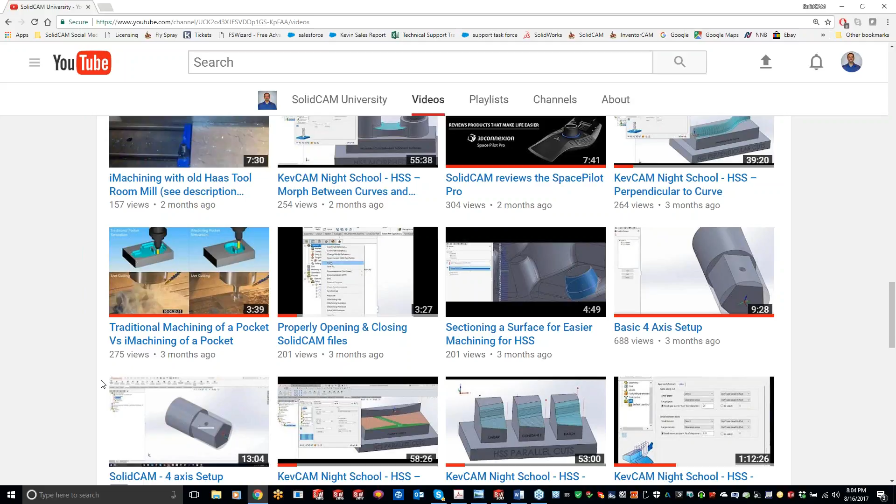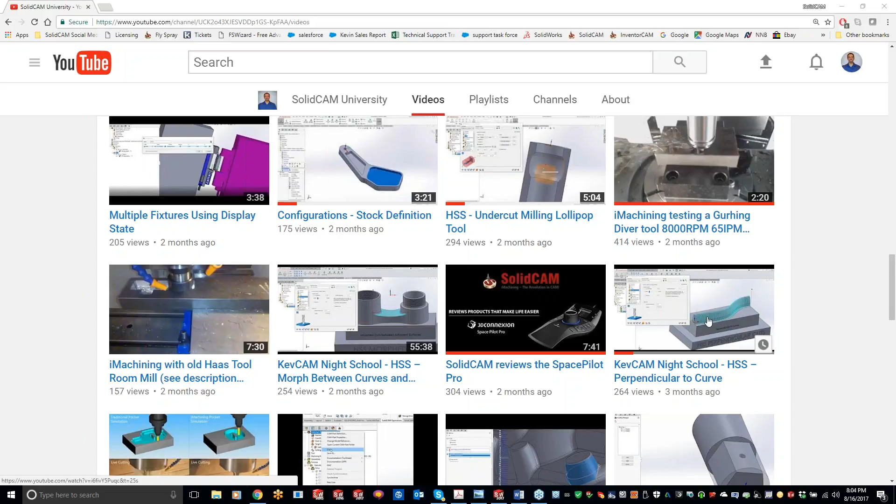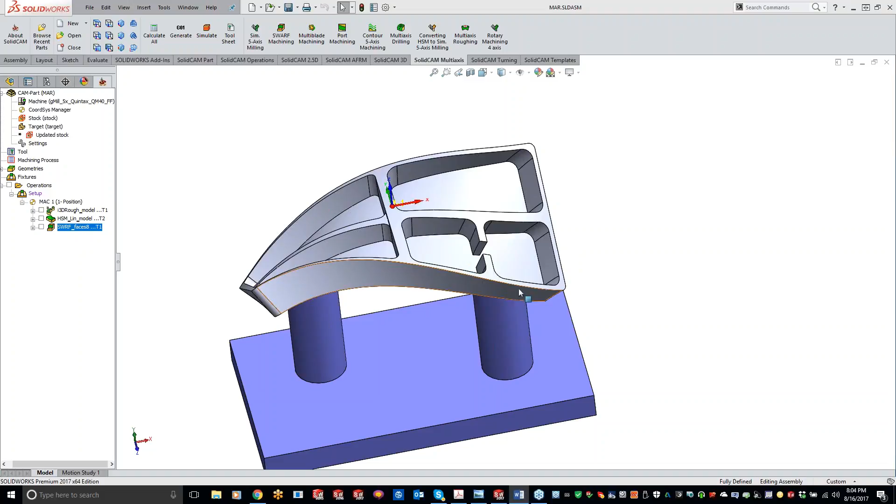With that being said, let's dive into the multi-axis roughing. Multi-axis roughing is kind of a niche for the 5-axis side of things, and multi-axis is more or less just for doing pocketing in a 5-axis environment. So you'll see we have a pretty radical aerospace part right here. Normally, to machine this part, we would have to separate everything off, and we're not going to be able to contour to that floor, wall surface, or ceiling - it would just be straight lines going across and machining that out. So to actually get down in there and get a good roughing 5-axis cut and get that material out of there, we're going to want to use our multi-axis roughing.

There's a couple different options in there, and it's pretty simple to use, but it's kind of a niche area. Personally, I haven't used it very much in the 5-axis side of things, just because it takes that special kind of part. So a lot of those aerospace parts, or if you're looking at doing a bunch of pocketing on a curved surface, this is where it's really going to shine for you. The curvature doesn't matter, the sidewalls don't matter either, but we do need to have a floor and sidewalls for this toolpath to work.

So like I said, kind of just more or less for the pocketing side of things. But with that being said, I got this part kind of roughed out. So we just did some 3D machining, some HSM, and I'm just going to simulate the swarf machining here. We're going to get to swarf machining in the next couple classes, but I want to show you guys what we're starting off with here on the machine sim, and then you can see where we're going to take it from here.

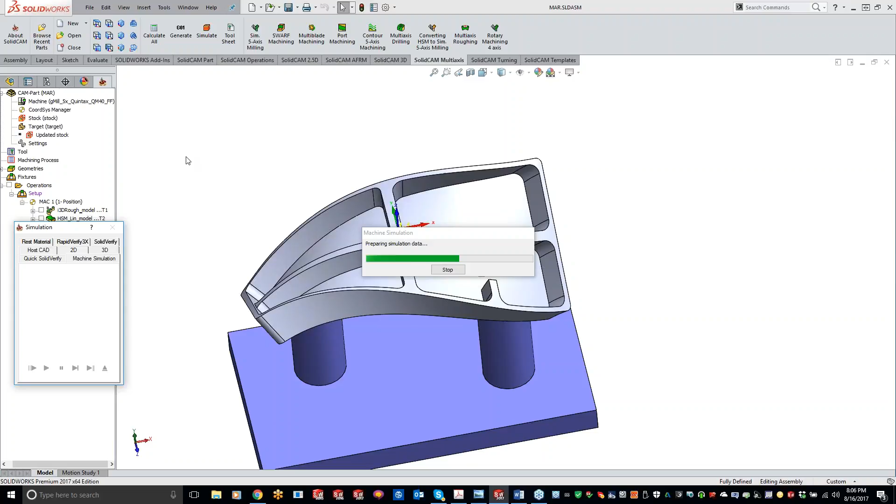So I'm going to load up this machine sim here. Now this head 5-axis machine that we're using is fairly large, so it does take just a hair longer to pull up the machine sim. All right, now we're getting everything loaded up in here.

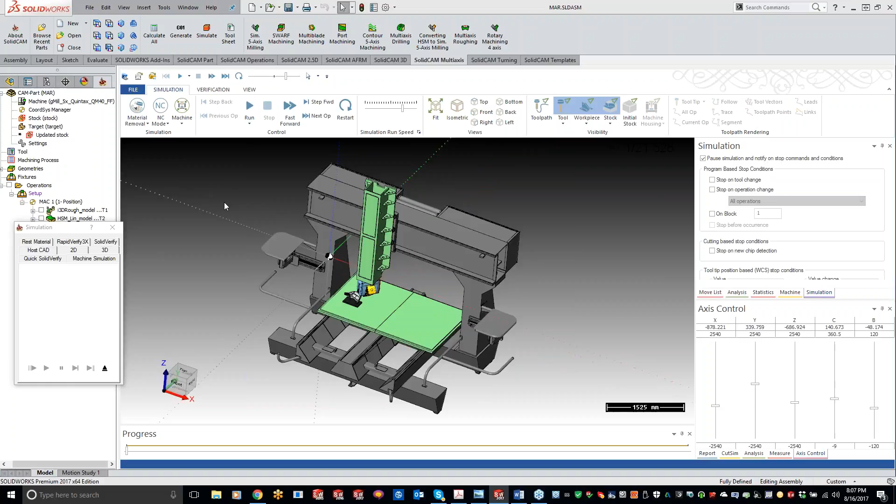Okay, and Norm, is this the machine sim that you were kind of looking for? Let's see if he pops in here.

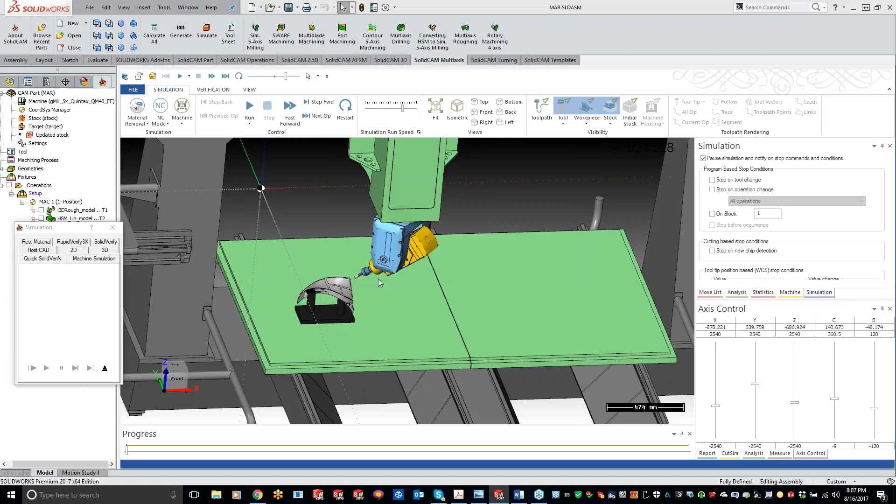Okay, so just got this bolted down to a big table here, kind of like a 5-axis router. But we're not using a trunnion to do the 5-axis. We're going to be using this head here. So if we go ahead and play this through, just going around the outside perimeter, getting everything machined off. So you can see where we left off. Let me zoom in here. We just got everything roughed out, everything but those pockets inside the center there. I can speed this up just a little bit.

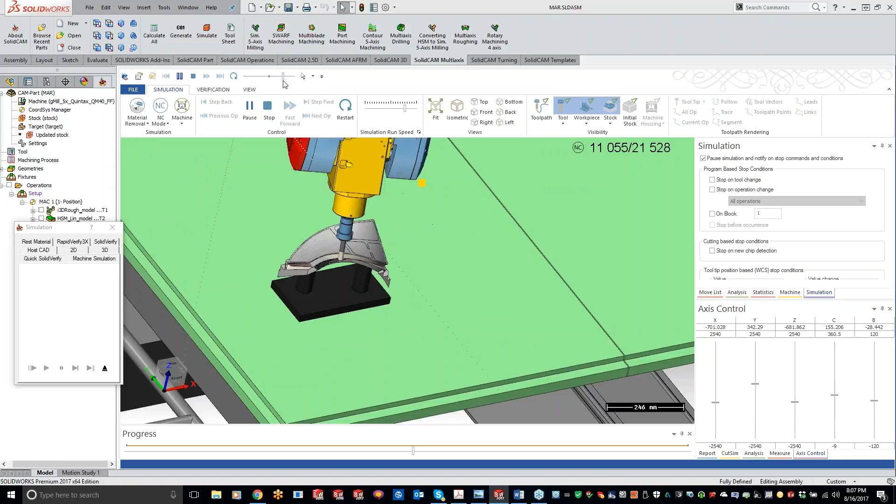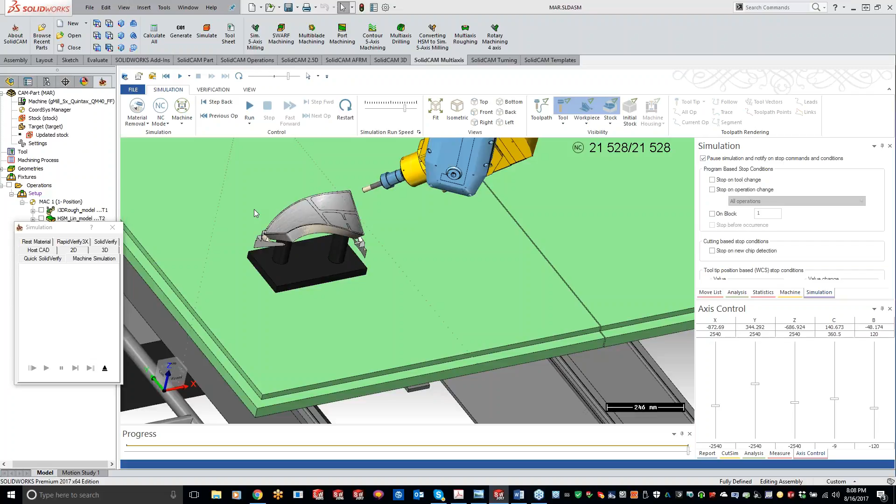Hey, Kevin, looks like Norm has a question. Or just, I guess, answering your question. Oh, yep. Yes, very, very similar to ours. Perfect. Thanks, Norm. Norm, do you have a machine sim for that machine? I got the post from the posting, but didn't have a machine sim on file for you. So if you do, Norm, definitely send that over to me in an email, and then we can actually use your machine. Not next week, because Justin's going to be doing a pretty sweet impeller, but the week after that. Yes, I do. Perfect. Yeah, send that over to me, Norman. We'll get that put in here too.

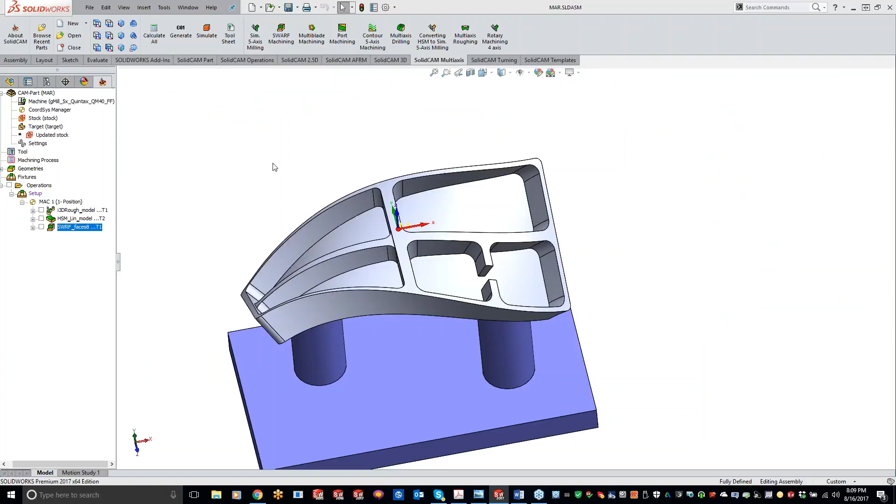All right. So here's where we left off. We have everything basically done all the way around the outside of this goofy part. Started off with a big block, but now we need to get in there and rough out these pockets. So go ahead and exit out of here, and we'll grab our multi-axis roughing. We only have one option, radial roughing right here. So we can hop down to our geometry.

Now we have a couple different strategies here. We can use offset, which is going to do a pocket style, where it starts in the center and works its way out. Or we can do adaptive, which is going to do a spiral. So two different tool paths that we can pick from. Now, one other thing is we can do an offset from floor, so the tool path is going to follow the curvature of that floor. Or we can do offset from ceiling, so it's going to grab the curvature from the ceiling and work its way around that part.

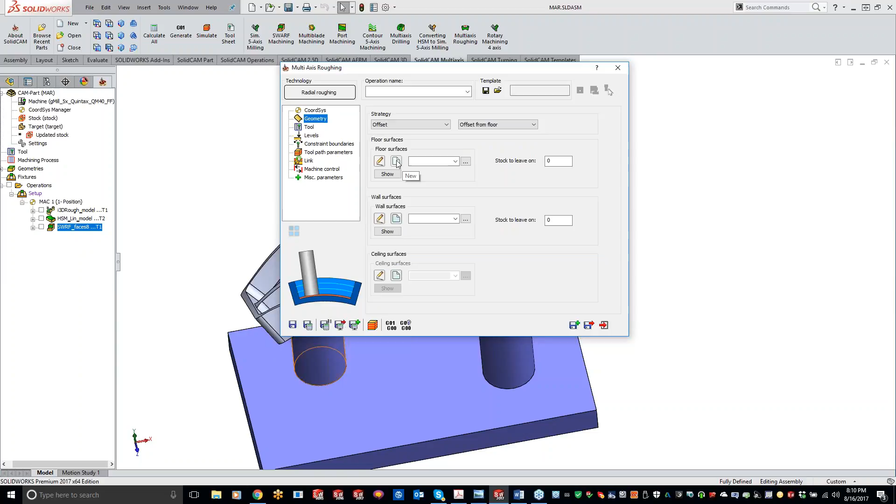Or we can do a morph between boundary curves between the floor and the ceiling. Like we were talking about with 5-axis morph between boundary curves, it's going to take the top and the floor and merge them together. So at the top, we're running flat, but when it gets down to the curvature, it's automatically going to start curving around there. But for this one, we'll just do an offset from floor, and basically choose what floors I want to work on. So we can go ahead and grab these 4 floors here. So those are the 4 floors that I want to work on.

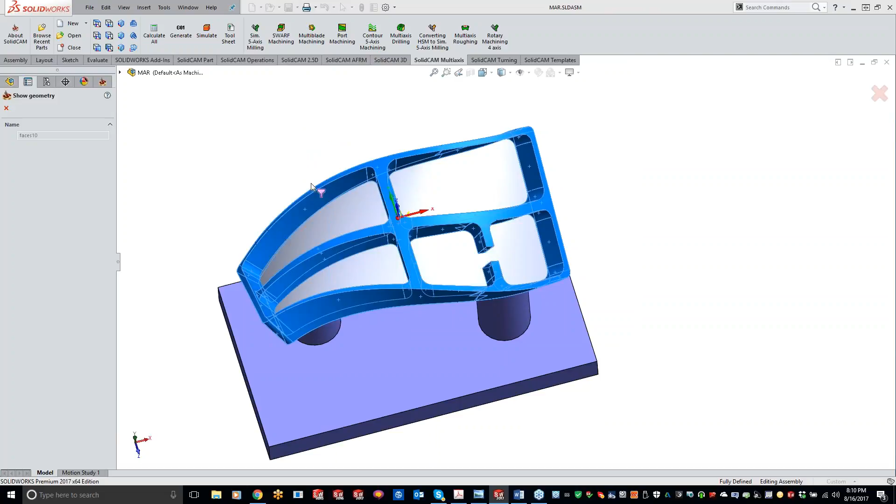And now the wall surface. Now, I already went through and grabbed the wall, but here I'll show you. Grabbed pretty much all the walls that I could here. Now, one thing is, and actually I'm going to be going to development with this, but when we did the HSS and the check surfaces, there's that button over here where you can say all adjacent surfaces. I'm going to see if they can add that in for us here.

I think that would really help out because when you're working on the multi-axis roughing here, pretty much anything adjacent to that surface is what we want to use as our wall, since we're using pocketing. So I'm going to see if I can get that added in there and save a little bit of click time for you guys.

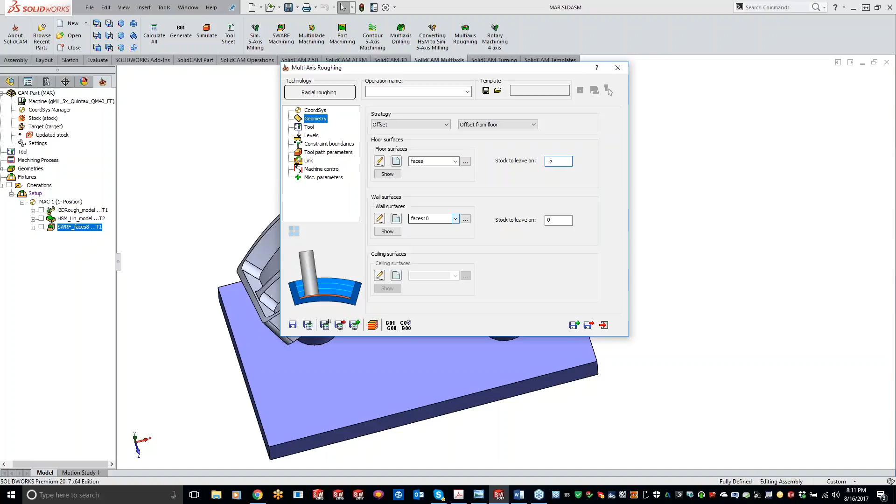So that's the floor surface, the wall surface. Now in this one, since we're just doing offset from floor here, I don't even need to pick anything on the ceiling surface. And we'll do a 0.5 millimeter floor and a 0.5 millimeter for the wall surface there. So we got something to come up and clean up here. And we can go ahead and grab our tool.

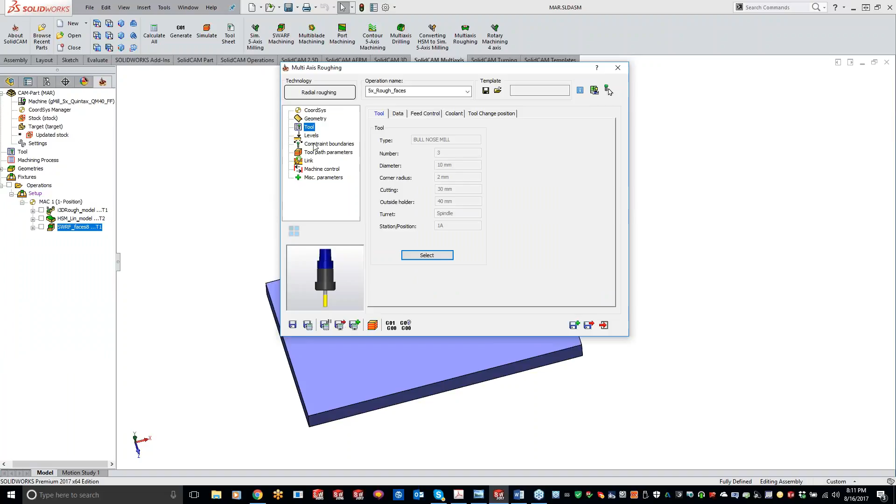And we'll grab this 10 millimeter end mill here. Levels, not much in here. Pretty much everything's kind of locked down. The only thing you really have in here is retreat distance, your safety distance, and exit distance, so you can change those around a little bit. Advanced, nothing we can even pick in here. Constraint boundaries. Where do you want to constrain it to?

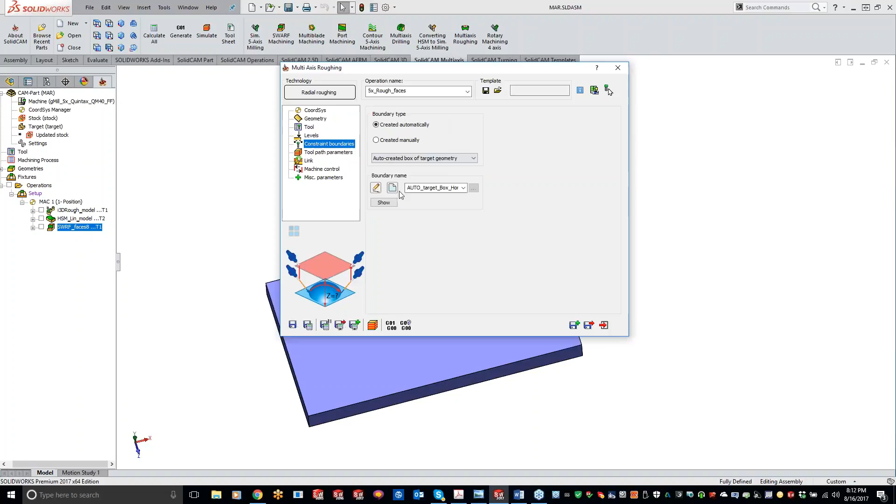Now, a lot of times, depending on what you're doing, but for this particular one, since I'm wanting to do this entire area, I can just leave it on automatic. But if you guys wanted to, just like HSM, you can come in here and do manual and do a chain around anything that you want to constrain it to a specific area. So a little bit of HSM in there for you guys.

Now, when we get into the guts of things, right here is your step down and your step over. So for this particular part, let's do a step down of 5 millimeters, and the step over of 4 millimeters here. So that is your step down, step over.

Now you'll see right here, we're grayed out. And we don't have that option to change those right now. And that's because the strategy is what determines that, and we picked offset from floor. So when we switch this over to do the adaptive or the spiral, these options will actually open up for you.

All right. So if we go to sorting here, we can do zigzag, climb mill. We can do machine by levels or regions here. Smoothing, the default works very well, but basically, do you want to have smooth corners, or do the sharp 90-degree corners? And same thing with the final cut. And then, if you want to do smoothing between the links. So as we're going from one pass to another pass, it's going to do a little bit of an S curve going into the part there. And you can change up those percentages there.

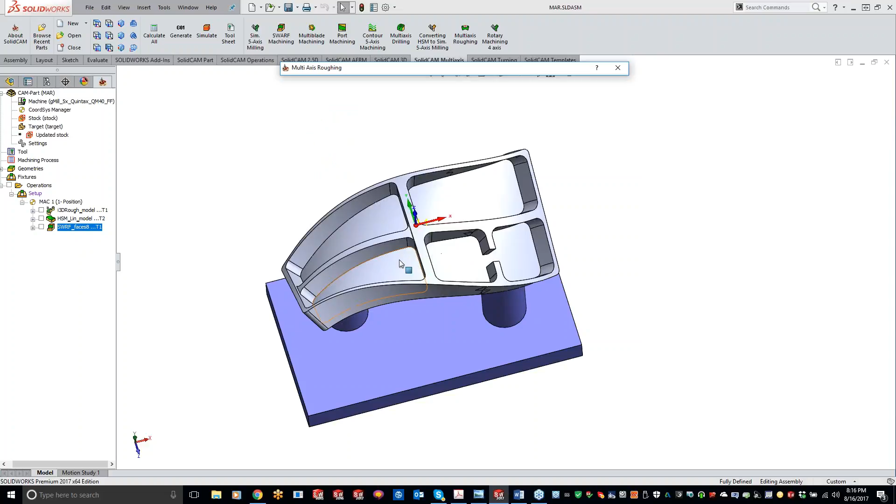Approach and retreat here is, do you want to lead in, lead off on that first entry point? And then here is between your slices and all that stuff. So we can do retract distance. And what I like to do with these is when it's going between groups, I want it to retract, obviously, so I don't plow through my wall. What I'm talking about is when it's working from this section and then coming over to this section, obviously I want to come up to the clearance.

But what I want to do is use a ramp going in there. And then same thing between my slices. Since it's going direct, I like to go back up to the rapid, and then I can use my ramp, and same thing between regions here. So if we do, yep, we can use ramp right there.

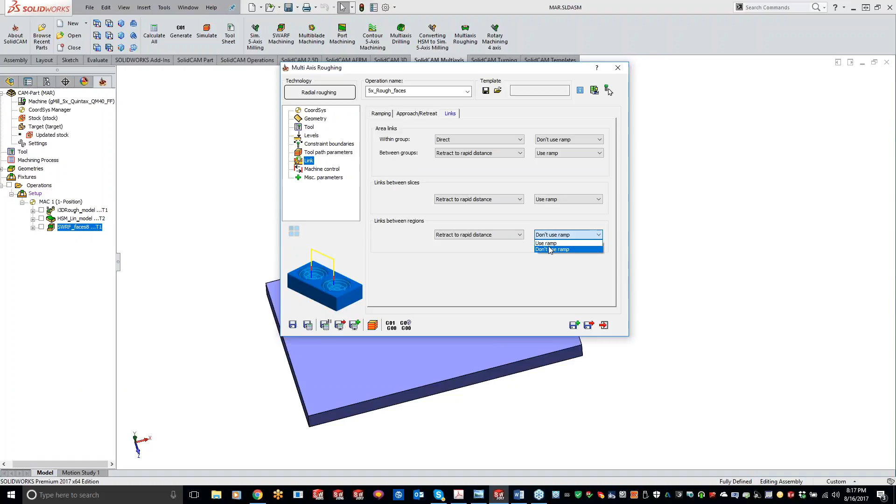So one other thing I wanted to mention is your surface quality. These are set actually quite tight. What I notice is with the cut tolerance, since we're roughing, the cut tolerance really isn't that important. If you think about it, we're leaving 5 millimeters on the wall, 5 millimeters on the floor. So you guys can open this up. Like I said, on this part we're working in metric, so I'll just do 0.1 millimeter. And that's going to save you calculation time too, to speed things up.

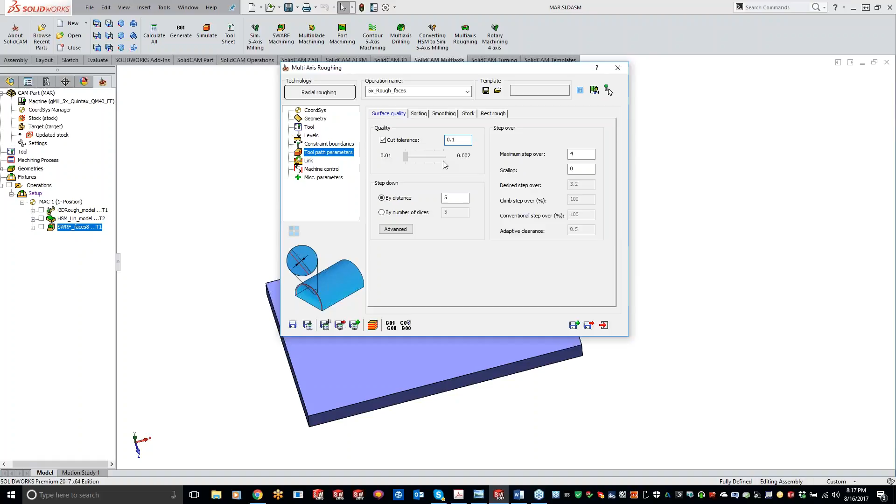So let's just go ahead, and I think I got everything covered here. Machine controls is all your 5-axis stuff here. This is the same in pretty much every operation inside SolidCAM, and same thing with the miscellaneous parameters. So with that being said, let's get some toolpath on here.

Now, unfortunately, my computer may be a little bit slower right now because we just finished doing a live iMachining cut literally 20 minutes ago, and it's still rendering out the video. So it may take a few seconds longer here.

Any questions with what we covered here so far? Like I said, this one's a little bit more of a niche area, but works very well.

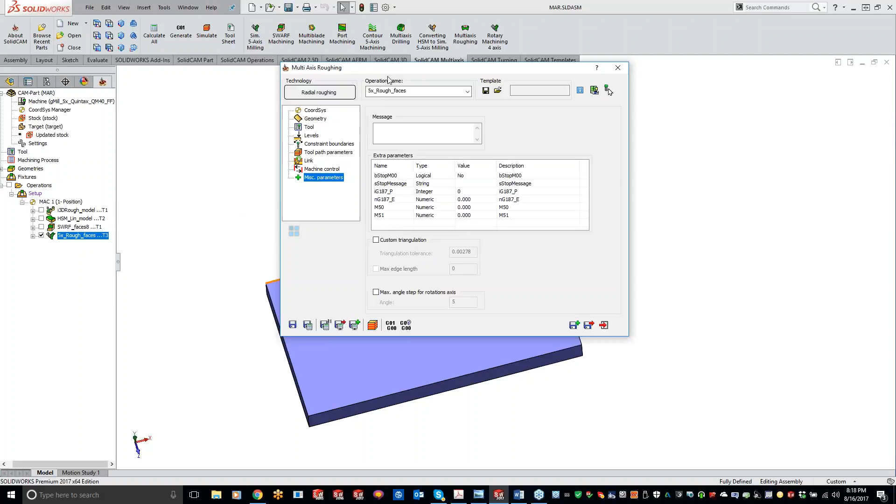Okay, so you can see our toolpath. I'll get a little side view here. Our toolpath is following the exact curvature of that floor going all the way around there. To get a better picture, let's do a simulate, and we'll start off with solid verify first. Get our updated stock going here.

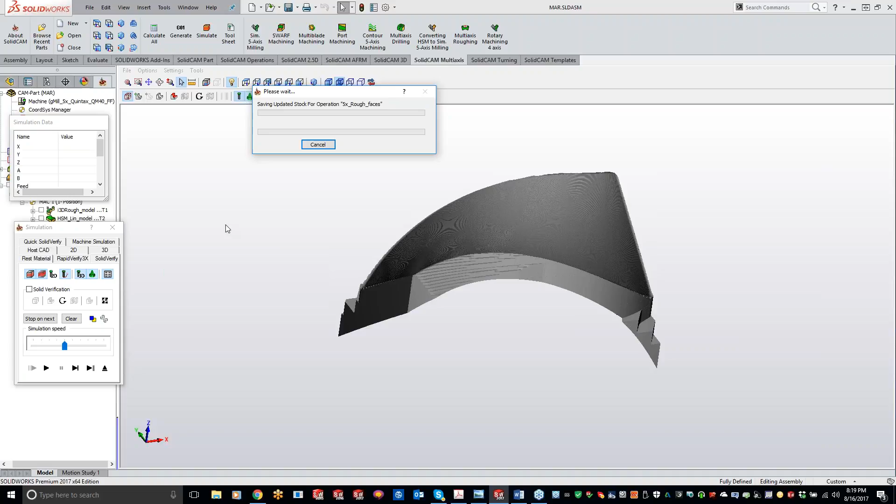Come on. Boy, that video rendering is really bogging down my computer right now. Okay.

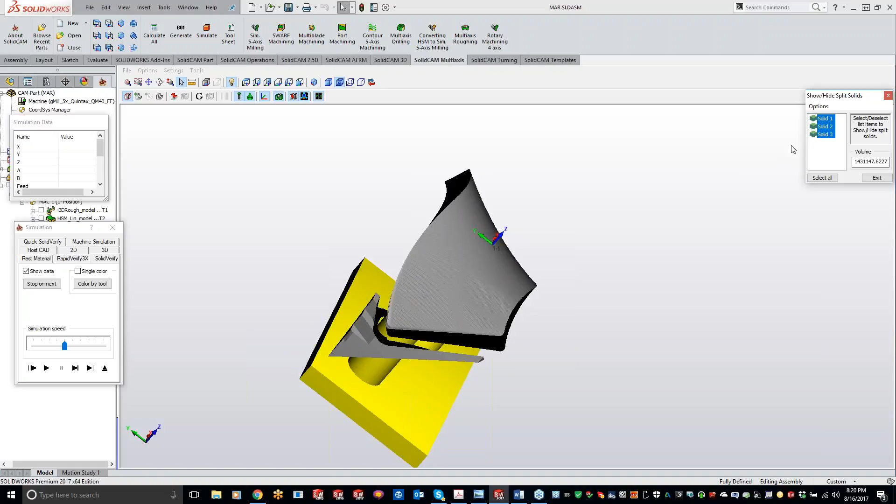So we got our part in there, and these are just the pieces that were left over, and if I want, I can come in here. I think it's this guy. No, that's my fixture. And I can, there we go, get rid of those slugs that would have fallen off there. All right, let's play this through here, and we can speed it up.

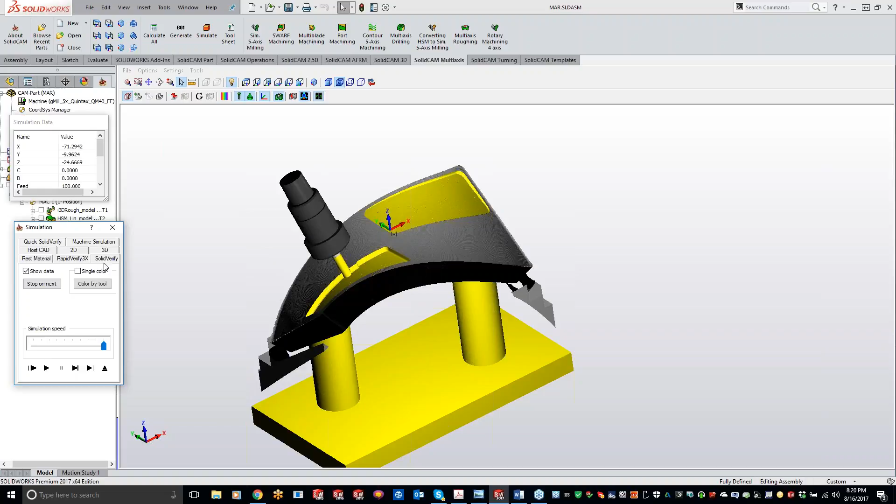So you can see the tool is following the curvature of everything that's going on there. Oh, and one thing I'm noticing here, you'll see I didn't go down to the full depth. What it's doing is coming over and doing each pocket at that level, moving over. Let me stop this for a second, and let's get that fixed.

So if we go to toolpath parameters, let's see, where do they hide that again? Toolpath parameters, sorting. And I'm going to go by region. What that means is it's going to work on one pocket, get it all the way down to size, and once it's finished in that one pocket, then it's going to move over to the next pocket.

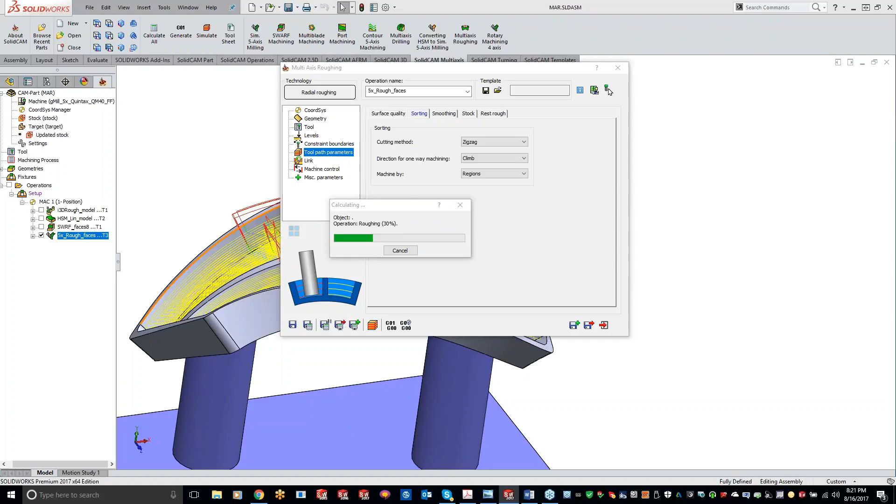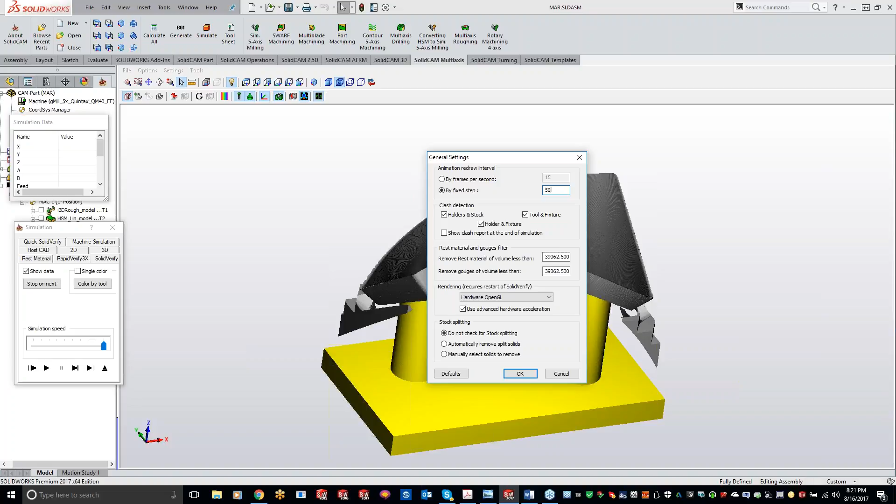Go. I'm going to simulate this here. Do solid verify again. And I'm going to bump up, or let's do every 50 lines of code here. So now we're kind of staying within that one pocket, and then it will bounce over to that next pocket here.

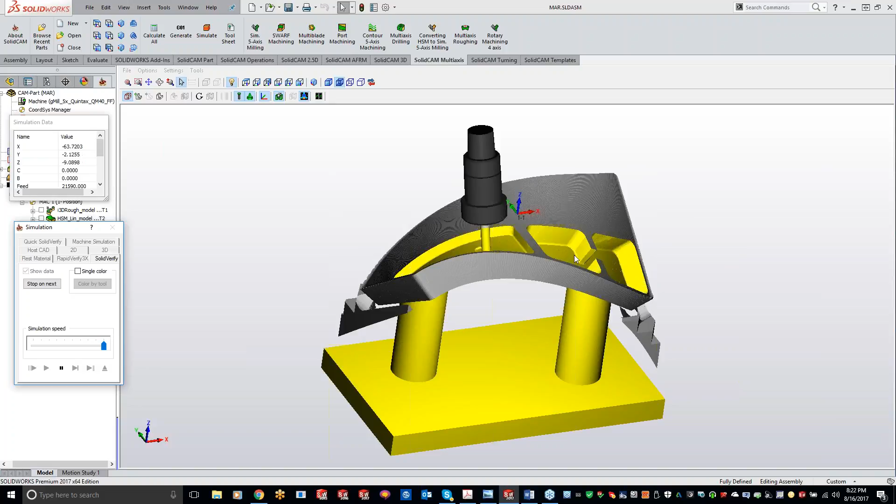Now, one thing that I found is, I guess, a little bit you don't have much control on is where it goes from the pockets. Even, I think I picked over here starting on this pocket when I clicked those faces, but it's really out of our hands on where it goes. I think it just kind of goes by the fastest route possible when you do by regions instead of by lanes.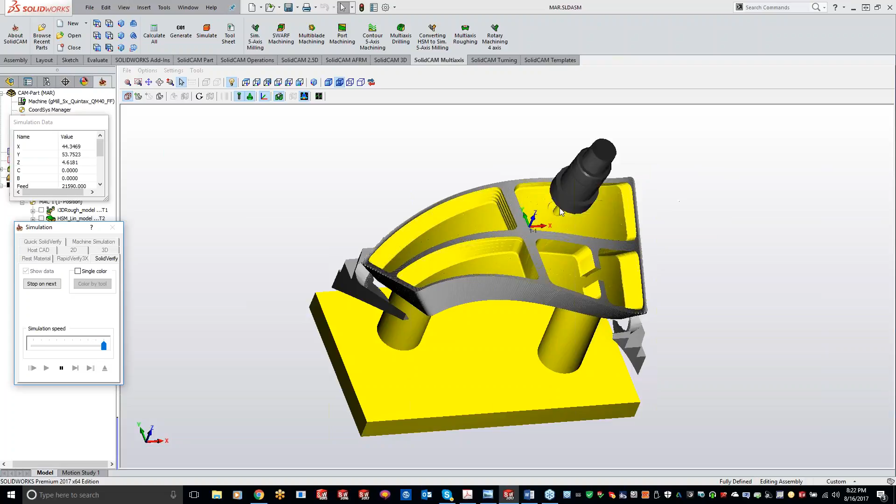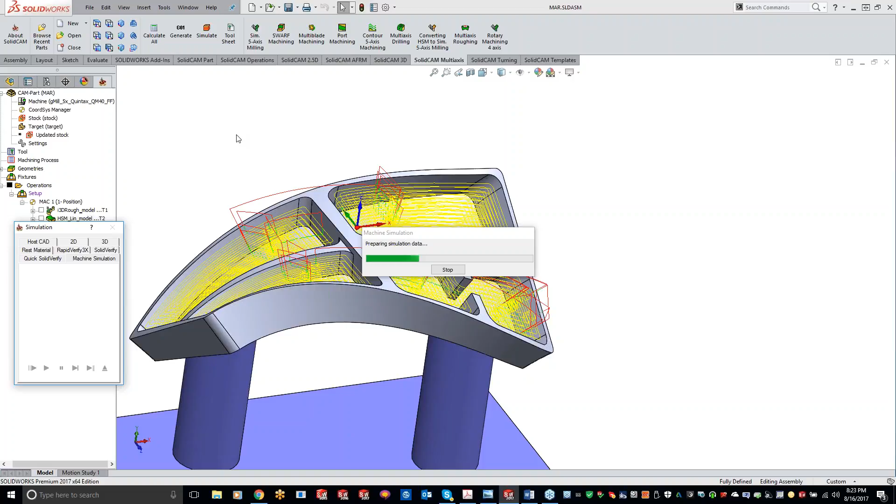But let's stop this and let's hop over to Machine Sim, and show you guys how that head is moving around in there. And if you guys do have a machine sim that you'd like to see me use in the next class, send those over to me, and I'll show you once this gets done simulating through here how to send that with the machine sim file.

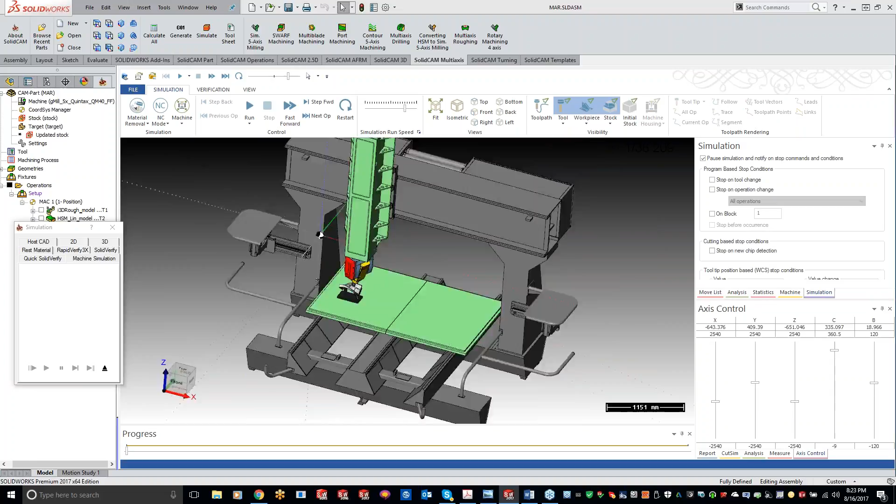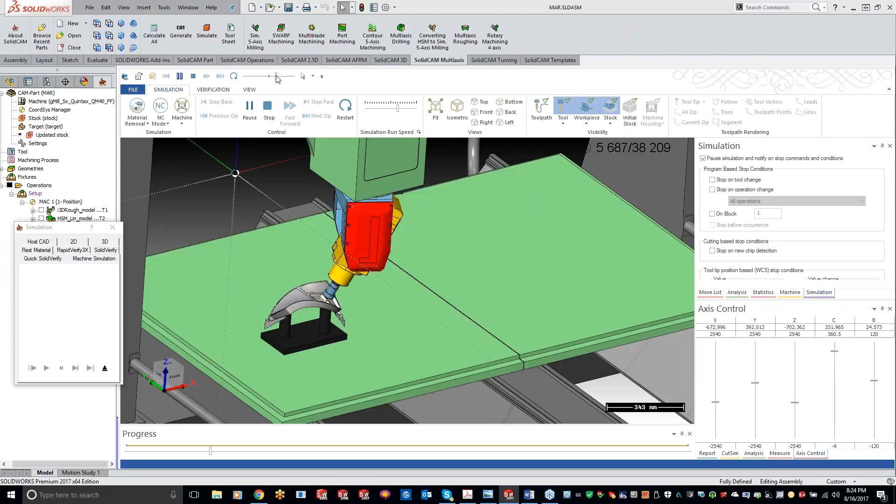All right, get everything loaded up here. All right, let's get zoomed in here, and slow it down a little bit here. You can see the head really working its way around in there. And then each time it's going down in a level.

Hey, Kevin. Yeah. Looks like we got a question and then a follow-up from Ben. Can you see that, or you want me to ask it to you? Can you make a smaller hole and then enlarge? Yeah, I don't know if that's easier there.

Yeah, let me, okay. But I can't machine. I can't even be trusted to read the questions. That's how little I know about what I'm watching here, guys. So I'm learning a lot.

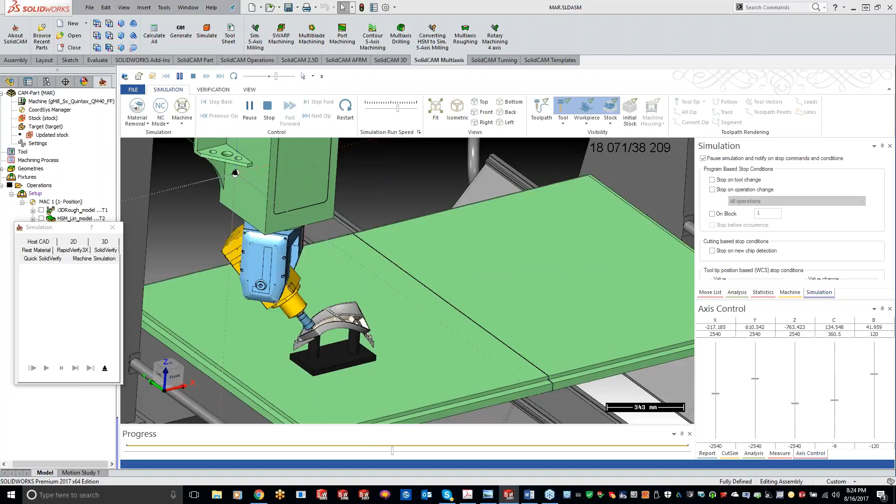Okay, so Ben, are you talking like do a pilot hole, and then it approaches in from the pilot hole? Let me check here once this gets done playing through. I don't think so, but I guess I haven't really played with that portion of it, but let me see if we have the option for that. Can I give you a different view here, you guys? And is everybody able to see that machine sim working?

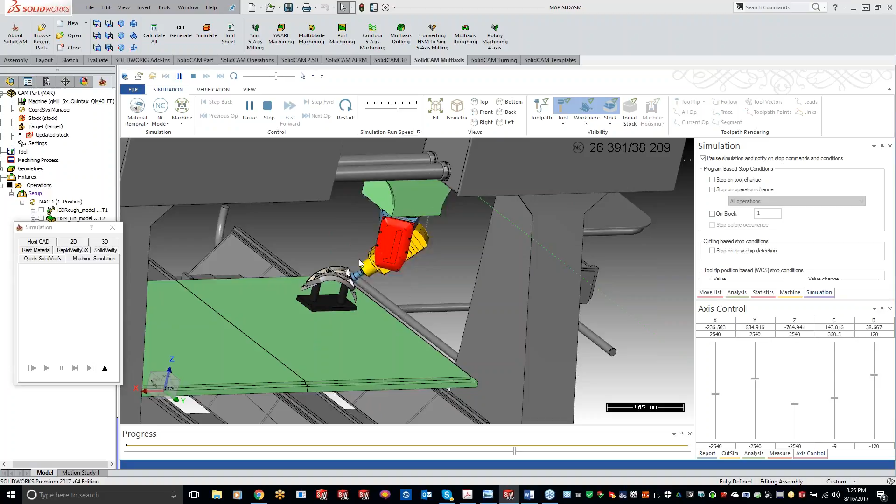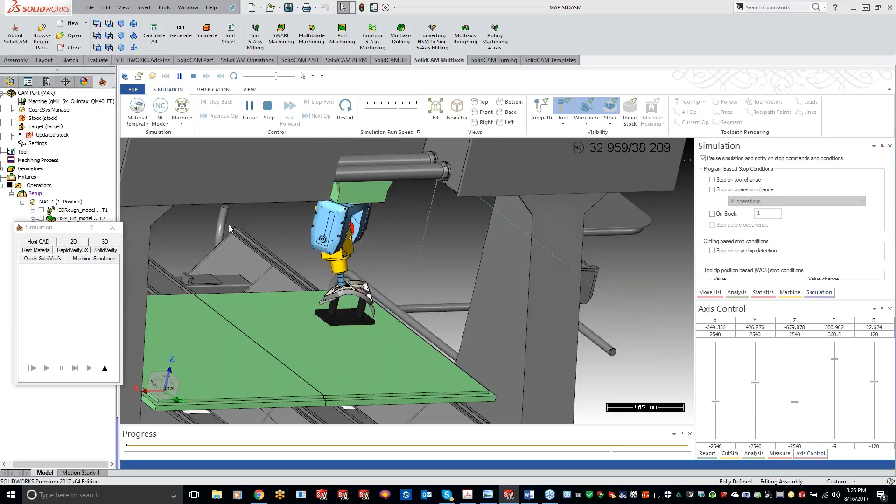What are you saying, Andrew? You couldn't program this part? I could do it in my sleep. It wouldn't look like that, but I could definitely do something. Yeah, this is no. And for those of you guys that don't know, both Andrew and myself have very young kids, so we don't get sleep period as it is. All right, so. Yeah, that's probably what I should do with my nights. Instead of even just pretending that maybe I'll get some sleep, I'll just go through and take all your classes. So. Yeah, there you go.

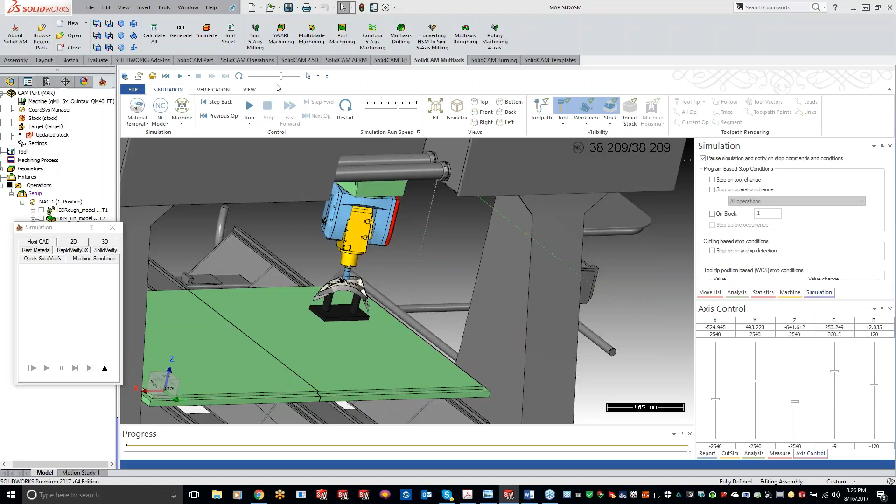We got another question or follow-up from Ben. All right. The reason I was asking was to use more of the tool length for roughing. Yeah. Let me hop out of here. And so if we go down to the toolpath and surface quality, I can take a larger step right here, but let's get into the link here and the ramping.

Now, I guess I don't have a hole in here, but I don't see any option. But let me tell you what, Ben. Let's see, was it Ben? Yeah, Ben. Let me do some digging on that and see if that's a possibility, if we can start off with a pilot hole, that way we're not wasting the time doing a helical entry going down in there for you guys. So, any other questions on this particular toolpath?

And great question, Ben, too, by the way. All right. So now we have got a couple here. Hang on. We got... No, I think we're good here. Oh, that's it. Sorry, false alarm.

Okay, maybe I can come down to Atlanta and see what we can do. Oh, absolutely, Ben. Come down and Ken will get you all straightened out.

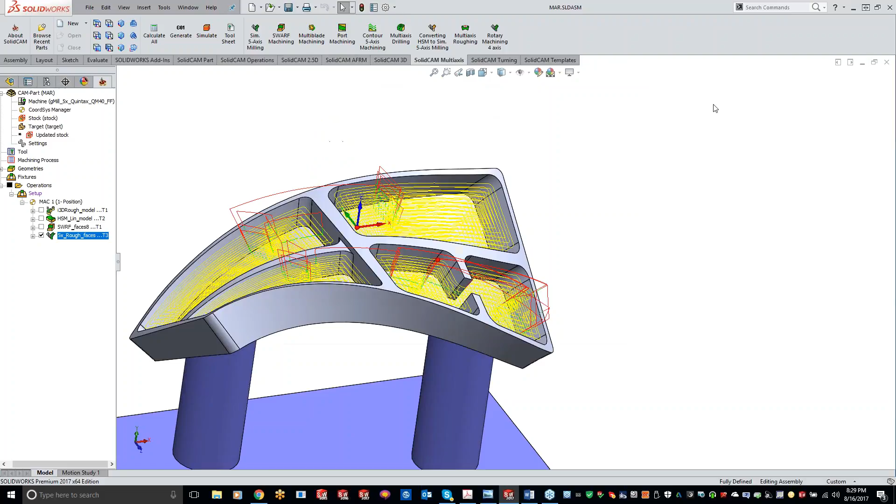Okay, so now we have the center completely roughed out. Now what I can do is use this as a finishing toolpath too. So I'll just open up this operation, and I'm just going to do a save and copy here. Our geometry is going to be the same, but now I'm going to switch it over to adaptive and show you guys the spiral and finish off the floor.

So I'll take off my stock to leave on the floor. And then the only other thing I want to change up here is my surface quality. Since I have everything pretty much roughed out, I can take this all in one step and just come down, because I just had that 0.5 millimeter left over. So instead of doing by distance, I can do by number of slices. Think of it as cuts by number of cuts. When we do 5-axis, you have the option to limit by number of cuts. That's basically what I'm telling it to do right here.

Now, since I switched over to adaptive, I get a few more options right here. I'm going to leave everything as default, but you can do a desired step over. Right now we're doing a maximum of 4 millimeter step over, but I can put a desired number in there and get a little bit tighter. And then I can change up my climb step over, so if I want to change it to 50% on the climb, or leave it at 100% and do 50% for conventional cutting. So definitely have that option right there.

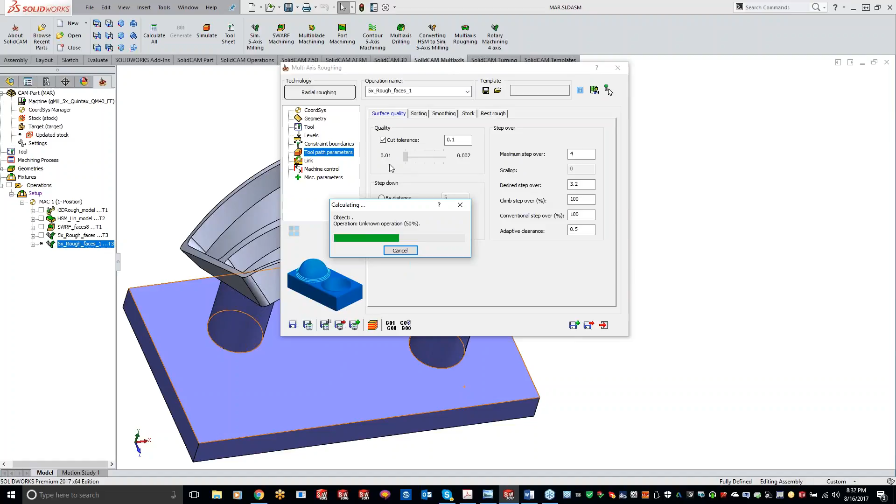Now I can set this down to 0.01 millimeters, which is pretty tight. What I noticed is I'm getting quite a bit longer G-code and longer saving calculation time, but I'm getting the same surface quality as before when I had a smaller versus larger tolerance. So feel free to increase that cut tolerance, you'll get the same results.

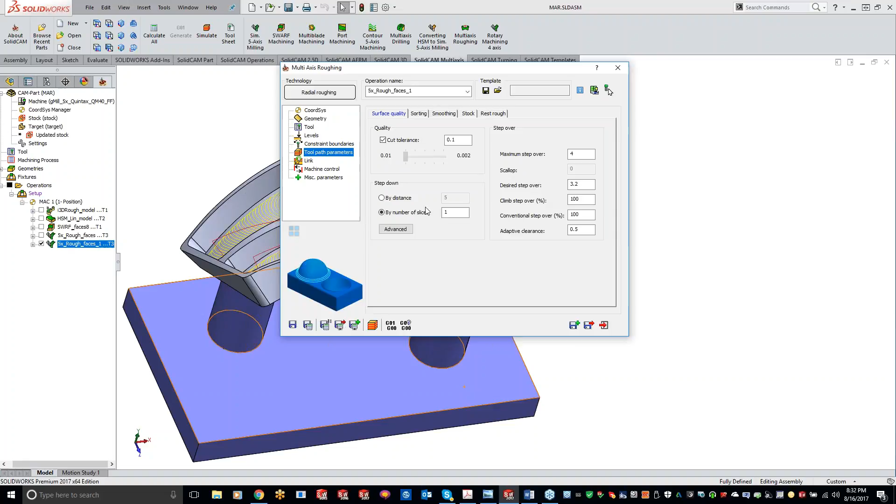Ben had mentioned here about the tool, you've got to watch out so the tool doesn't load up when plunging. Yep, absolutely, we've had that scenario. We were actually doing a live cut with that scenario, doing a helical ramp in there, but it was almost a plunge cutting.

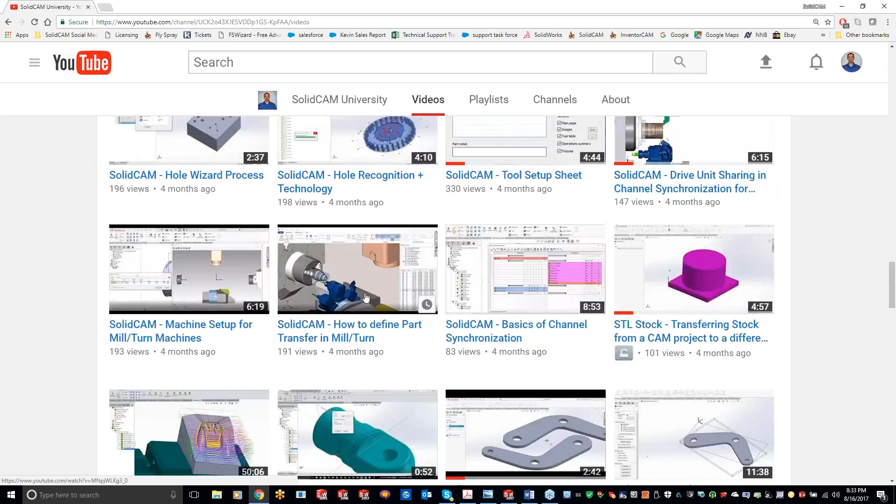For those guys that haven't seen, I did a video, let's see, it's a pretty cool one. Let me see if I can find it real quick. It was using that Gurhing diver tool. It must be up here. For the record, Ben, I thought the same thing when I was watching that. Right here is that Gurhing diver tool.

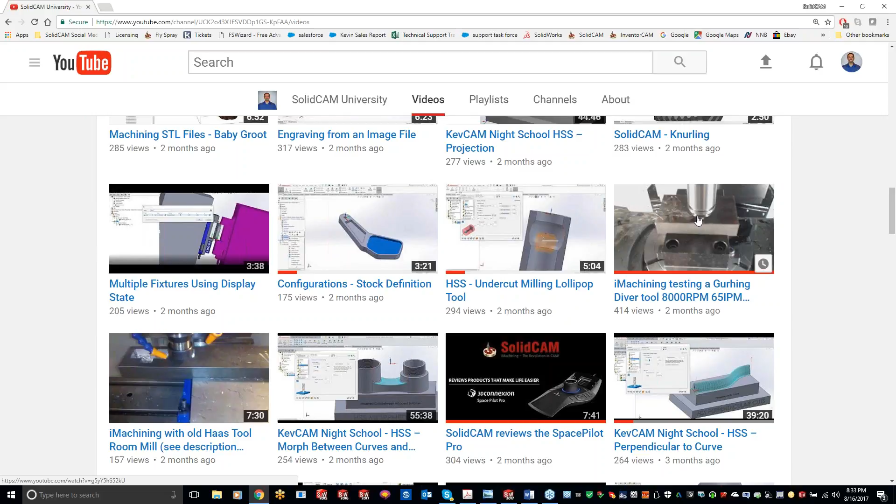What actually happened is we were doing a live cut, and we used the same angles and approaches for that Gurhing diver tool versus just a regular flat end mill, and we actually loaded up that end mill as it was coming down. So definitely a great point there.

Now you can kind of see coming in here, doing a nice spiral, working our way down, starting in what it thinks is a good spot, just doing a spiral, working its way around. As it gets to where it can't spiral or morph anymore, it kind of does iMachining, doing the trochoidal movement, working its way around. The only difference is it's not picking up as it comes around here, it's just race tracking around.

So if we go and play this through, let's try solid verify first here and show you guys. Get everything updated.

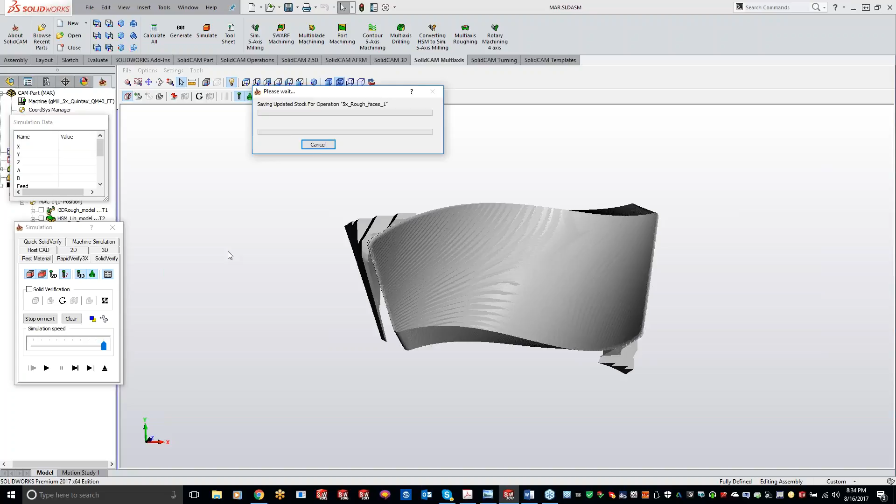All right, should be, here we go. We got, rather than a spiral, can you follow the form right? From Ben, let's see, spiral, can you form right? Can you give me a little bit more explanation there, Ben? I guess I'm not sure what you mean by form right. I guess, Ben, you have me a little confused.

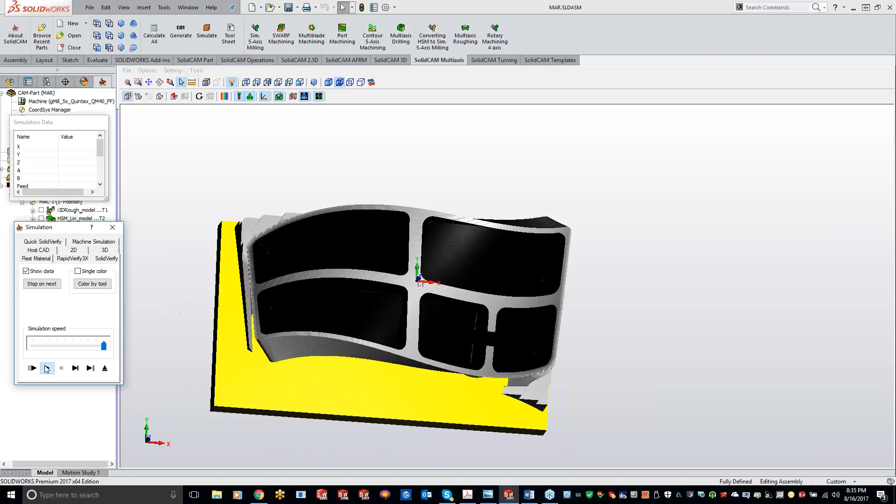Oh, kind of following the rectangle surface. Yeah, that would be more or less a diagonal coming in, and yeah, we can definitely play around with that real quick here. I'll go ahead and play this through, and let me get rid of that tool holder so we can see what's going on here.

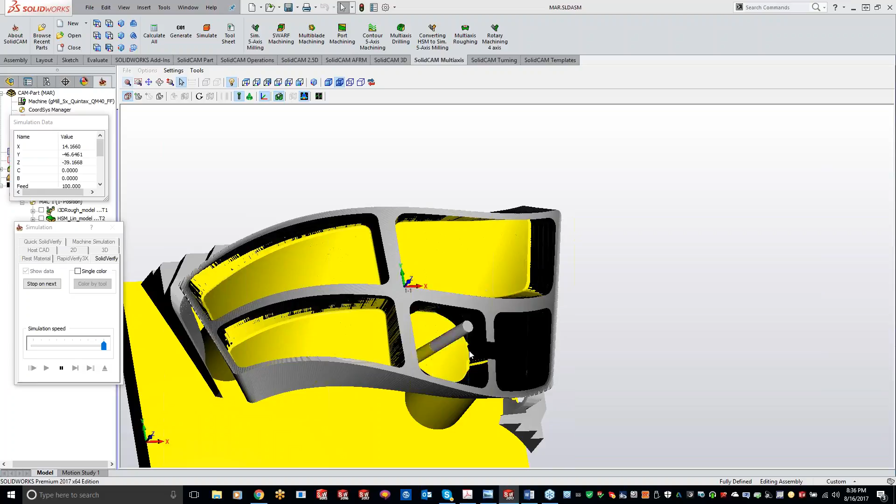Doing a zigzag, going back and forth, pretty much just cleaning up that floor is basically all we're achieving here, doing a spiral for the most part, or morphing I guess you want to call it. Then when it gets to the walls, it switches over to that morphing spiral, or I'm sorry, T-slot trochoidal movement.

There we go. And if we want, let's go ahead and play this through machine sim real quick so we can watch our head rotating around.

Like I said, something with this, I don't know if it's such a large machine why it takes so long to load up here, but we'll blame that one on Norm. He wanted to see a head rotation, so just kidding, Norm.

Okay, so let's get positioned in here, and we'll slow this down a little bit. Basically what it's doing is it's keeping that tooltip orthogonal to each cutting position.

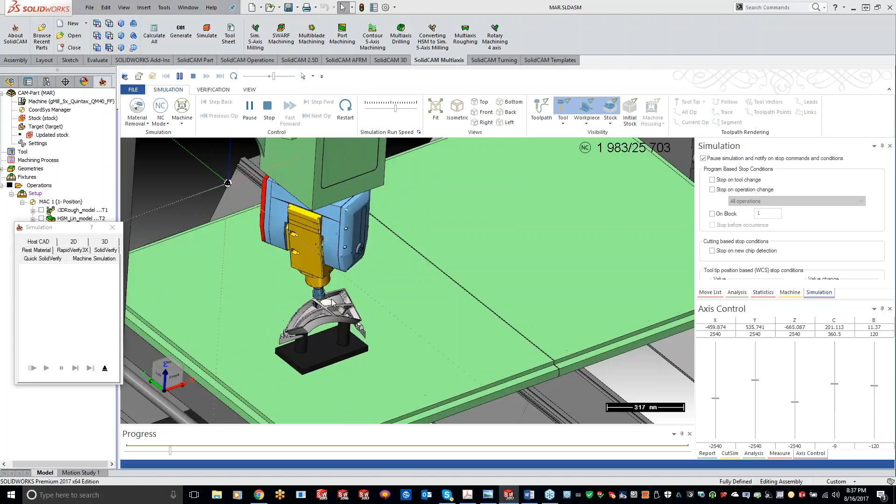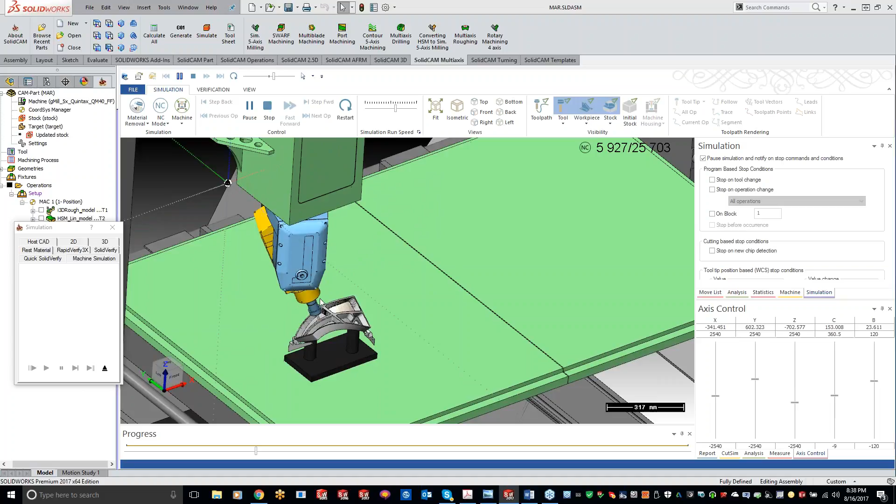Now I know we talked a lot about that with the 5-axis last time, but pretty much it's working on that tip. We don't have the option to work more on the side, using that lead lag angle and side tilt angle like what we did before. So this will get you a pretty decent finish, but if you're looking for that perfect finish, we definitely want to use a different strategy, one of our 5-axis ones that we've been talking about for the last couple weeks, or actually a month and a half.

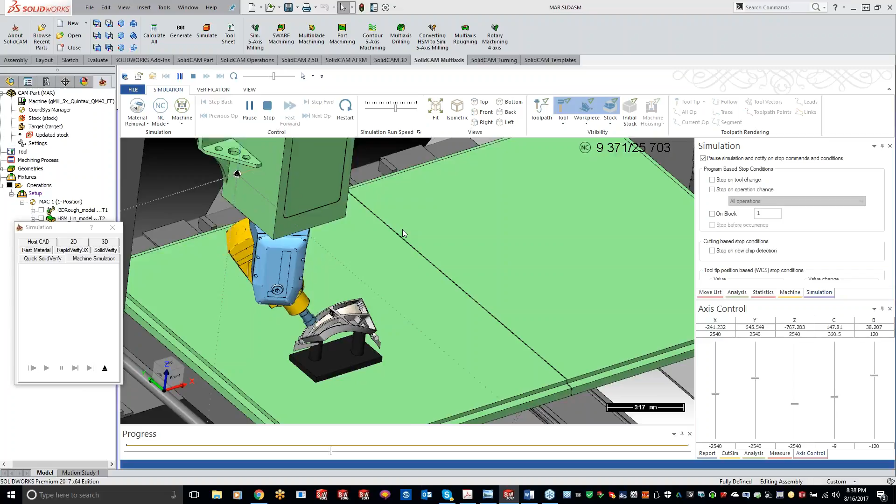So we can tip over, and instead of using the tip of that ball, we can actually use the side of that ball a little bit, just getting in there and working its way around here. Let me speed up just a little bit for you.

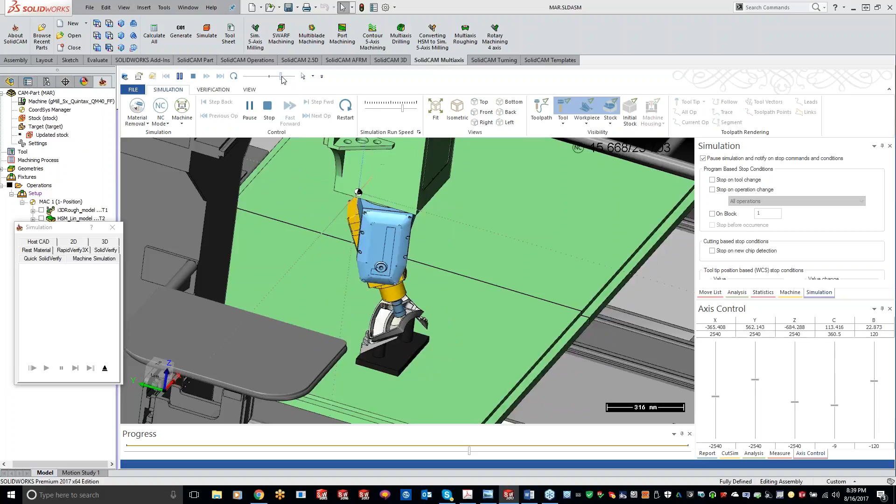Now let me ask you guys this. Have you guys ever ran across a part like this before? Anybody? It's a pretty gnarly part here, and my dad does a lot of work for Northrop Grumman, Lockheed Martin, and Boeing, and he said they see parts like this every once in a while. It's like they took it flat and just twisted it.

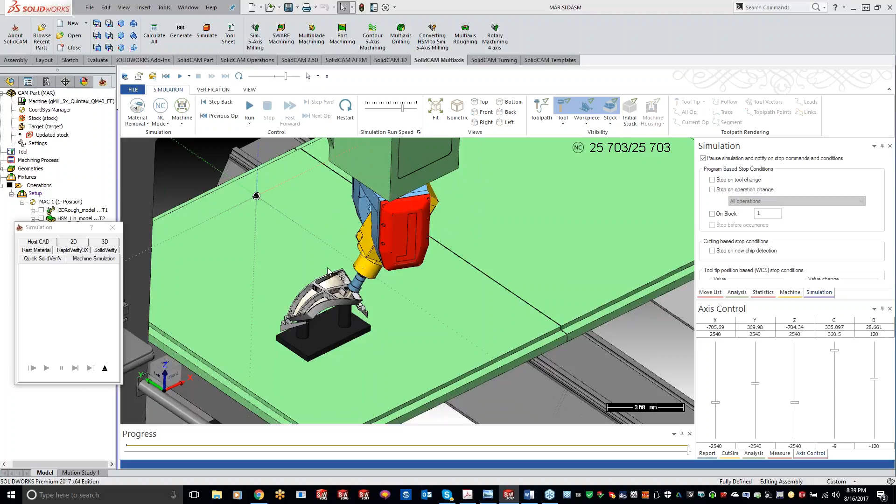But so there we go, kind of finishing off the floor there. And now to answer your question, Ben...

Let's see, we were going to... where did I go here? Ramping. Got a couple questions there, Kevin. Okay, so we got line right here, and let me just do a save and calculate.

Let's see, line ramp angle must be greater than 90 degrees. Oh, so let's do a ramp angle of 100 here.

Okay, I'm a little confused here. Ramp angle and adaptive roughing must be equal to 90 degrees. But when I had 90 in there, I didn't like it.

All right, well, this is calculating. No, my last CNC 4-axis machine was in 1985.

Ben, we were barely even born back then. I hate to say it, but no.

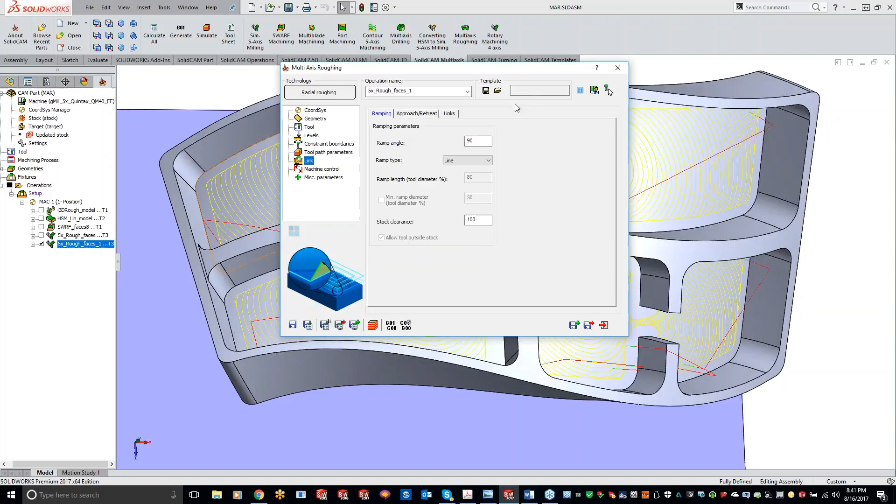All right, so if we go line... not doing much of a, looks like almost a straight plunge when we use line. Let's try - if we do a profile, I wonder if it will follow it - it should follow the profile.

Must be automatic line. Okay, so let's go to helical, or let's just exit. And since we are using it, it's telling us profile now.

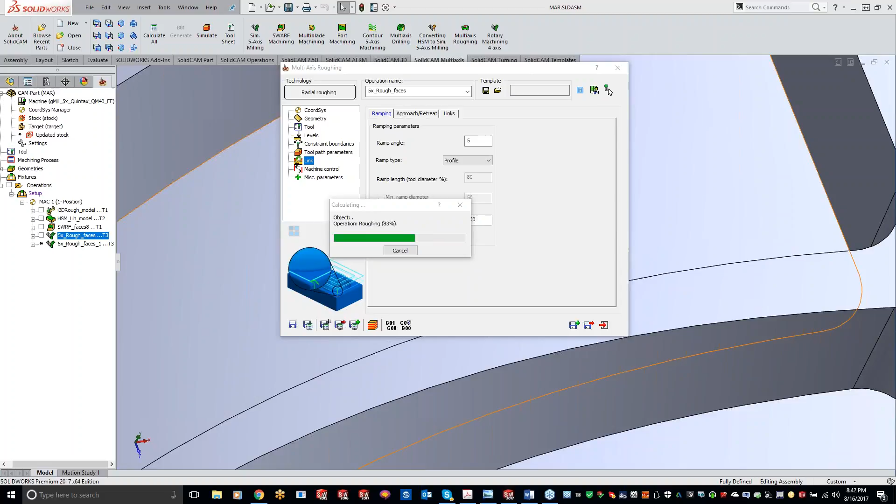All right, so let's take a peek and see. So yes, it is. Let me kind of get this top view down here. It is following - I'm just looking at this one yellow line right here. So it is following the curvature going down into the material that way. So we're coming straight down, comes right above the material, and then does follow the contour of that profile going into that material. So to answer your question there, Ben, yep, it can be done.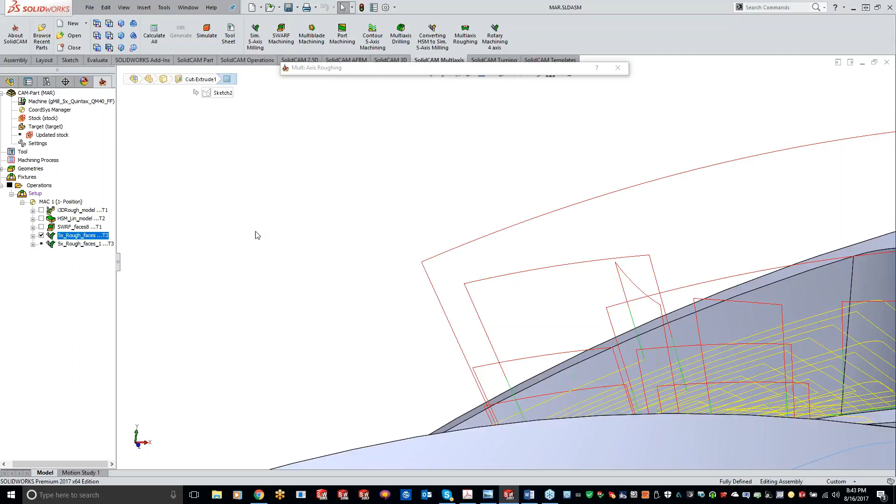But any other questions, guys? I guess that's kind of all I really have for tonight. I know there's a lot here, but you know, it's pretty simple. Like I said, you don't have a whole lot of options with strategies, but you can do the offset or the adaptive, and then pretty much, do you want it to follow it from the floor? Do you want to follow it kind of from the ceiling, or do you want to kind of find that middle point? And if we got a flat top and then a curved surface bottom or a floor here, kind of slowly, gradually working in.

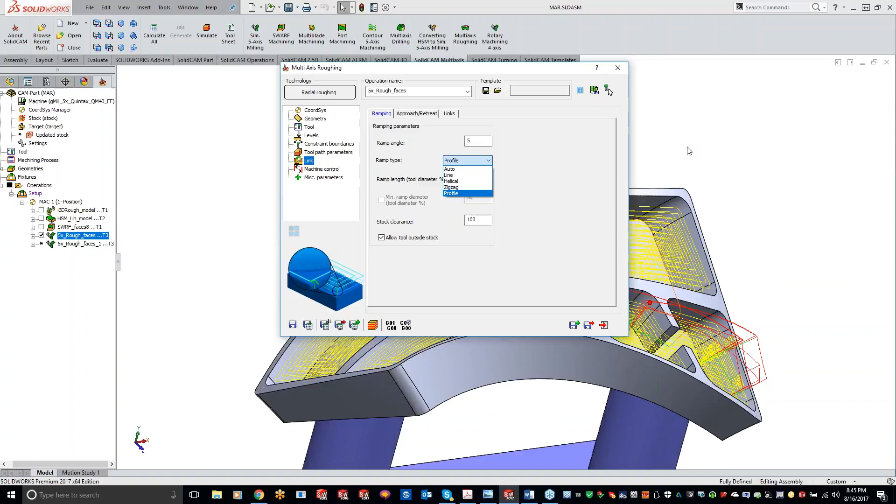Well, I guess for me it's a little different, because in Minnesota, it's like we only get about 2 months out of the year where it's nice and warm out, and then the rest of the months it's frozen everywhere. Yeah, you really can't blink too long. I'm with you, I'm in Pennsylvania. Yep, live it up while you can. Yep, but definitely - go ahead. Got a question here from Norm.

Were you going to show us how to send a machine sim? Oh yeah, send machine sim. Thanks, great, Norm. Forgot about that. Okay, so for those of you guys that want to see your machine sim, send those over to me. I'd love to show you the machine sims off.

So right click on CAM part, and I guess the first thing you want to do is make the file just a little bit smaller, and you don't really need to throw any toolpath on there. If you guys just pick your post, and you know that one has the machine sim, you can just send me just no toolpath with just a part on there, and I won't even use a part.

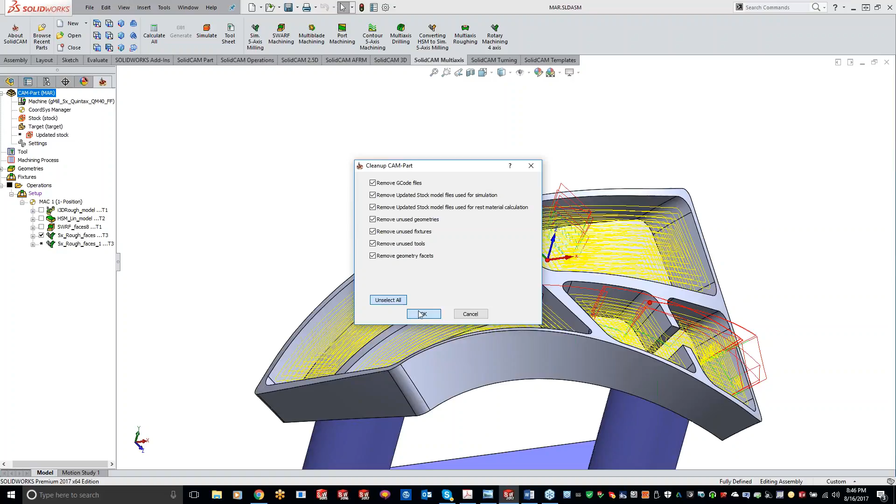But what that does is, if I come down here, you can do a cleanup CAM part if you do have some toolpath on there. This will eliminate any G code that's kind of stored up and behind the scenes, or stock, and all that stuff. So you can just do a select all, hit OK. It's going to remove all that unnecessary stuff that wasn't being used.

And then what you can do is send to, click folder, and use including machine sim. Now you'll get a dialog that pops up like this. It says package for technical support or end user, and do technical support because I need all the goodies inside there. So send that, and definitely you guys send those over to me, and I'll start using your guys' machine sim.

The more that we can show each other, especially since we have a bunch of people in the class here, if I get all your guys' machine sims, I can, throughout the 5-axis, show each one of your guys' machine sim on different parts. So definitely send those over to me and get those applied in there right away.

And like I said, next week Justin is coming in, and we're going to do somewhat a 5-axis wrap up. I'm kind of more on the simultaneous 5-axis milling wrap up, and then Justin's going to do some live programming in front of you guys on an impeller, using some different shape tools, some different strategies, areas he's found that kind of help out, tips and tricks and whatnot. And then after that, we're basically working down our list here.

So tonight we did our multi-axis. Like I said, next week's Justin, and then we'll get into swarf, doing some multi-axis drilling, contour 5-axis, 3 to 5-axis convert from HSM - that's a really cool one - and then rotary machining.